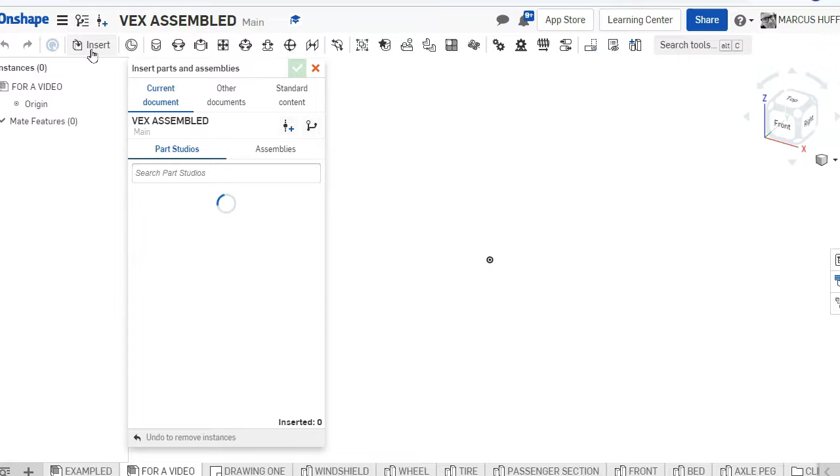We're going to choose insert, and I'm going to start with the part that's most central. When I look at this, it's the passenger section. So I'm going to click on that, then click out here somewhere and accept that. Starting from this view, I'm going to zoom out a little bit.

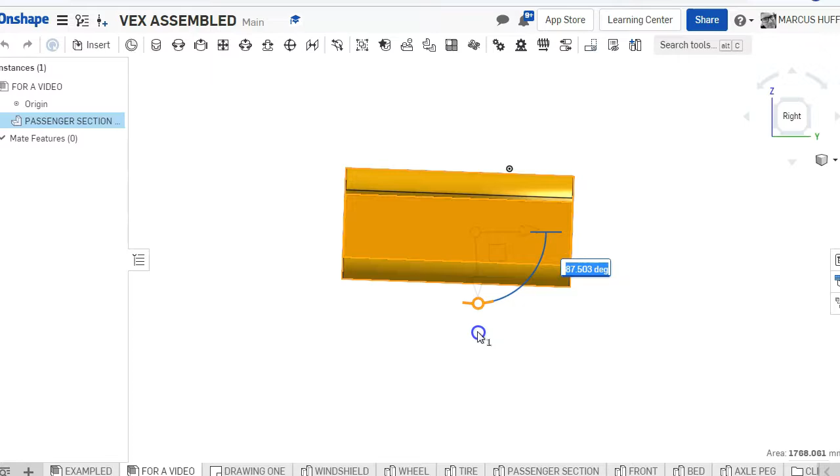I'm going to click on this and see the triad. I'm going to grab this little dot and rotate it 90 degrees so that the hole on the top is indeed at the top. So when I rotate that, you can see the passenger section is in the right place.

I'm also going to right click on this first piece, and only the first piece, and choose fix. What that does is lock it to the XYZ axis so that if we move it around, the axis follows this part. If you don't do that, your assembly can get misaligned. Let me repeat that: if you do not fix the first part, your assembly can get misaligned.

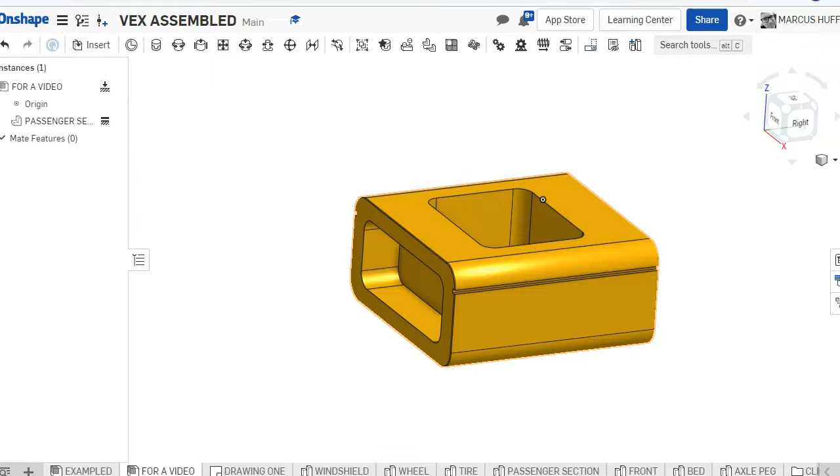Now we're going to add another part. I wanted to place that kind of far away from it so that I can see the faces that are going to connect.

In this assembly, I've left some things out because it was pretty complicated to get them all in there, and they really don't add any value to what we're doing for this assignment. So I'm going to hit insert part.

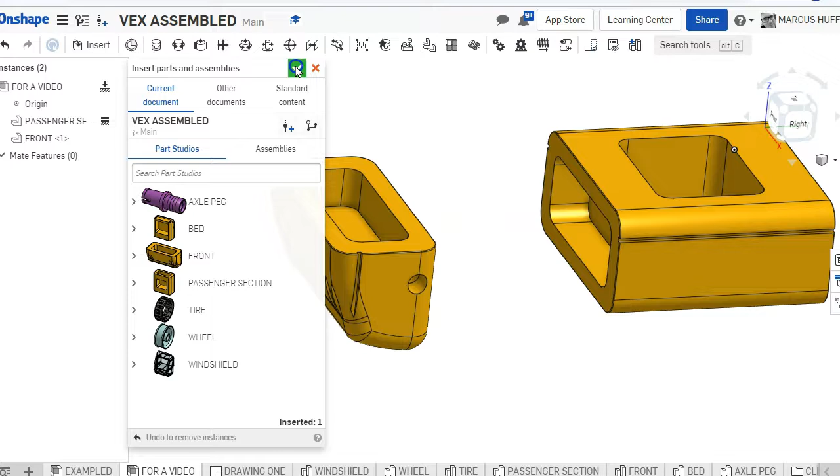So now I've got the front up here, and just like we did last time, I'm going to click on this right side and get the triad. I'm going to rotate this 90 degrees so that's roughly in place.

This doesn't have to be perfect. It can be just close and that'll be just fine. We're going to rotate it a little bit. Alright, let's try this again.

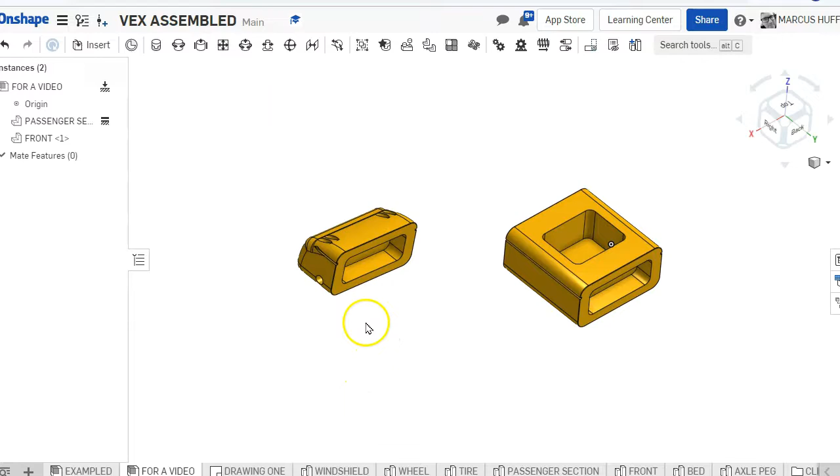There are two different kinds of constraints we can use to attach the front to the passenger base. One we can use is the planar mate, and we would zoom in and choose the face here - see how I've highlighted it - but the mate constraint position thing is in the center.

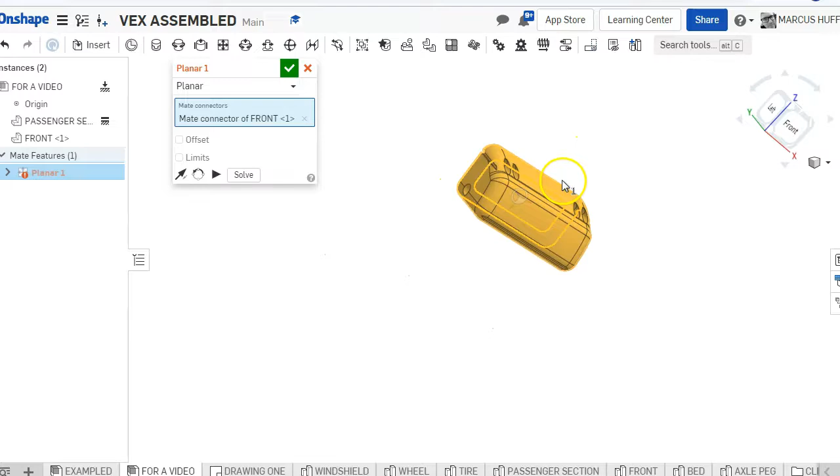That's what we want. Then we're going to rotate this view, zoom out a little bit so I can see the other one, zoom in on that. In the same way, I'm going to click on this face when that mate constraint is in the middle and it's following me around. There we go.

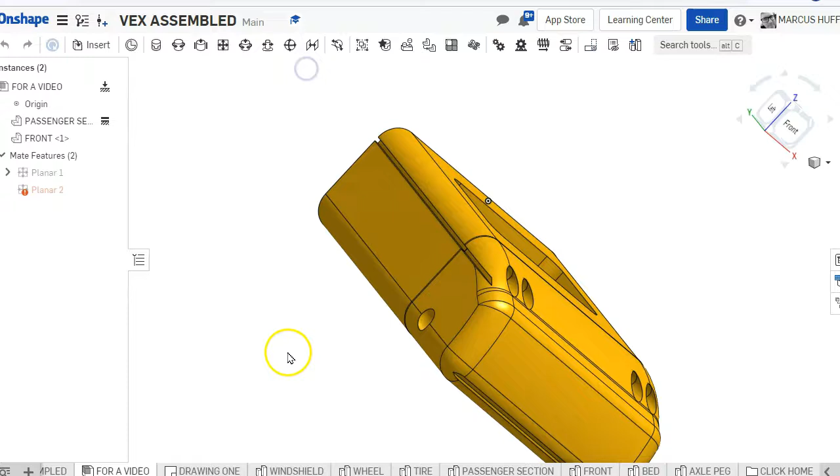And we hit apply. Now here's the thing about a planar mate: those two faces are stuck together. However, if I click on this, I can move it around. If you move it to the side, you can see it's still on the same plane - it just lets me move it. So that's really not what we want our car to do, but that's one you will need to know how to use for this.

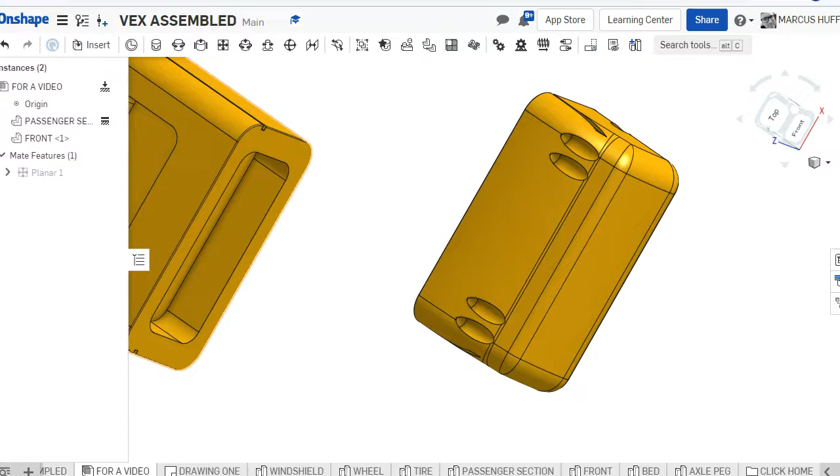So right now I'm going to hit Control Z and undo that, and remove that constraint, and we're going to put another one. What we really need is a fastened mate. We want the front of the car to be fastened to the body section.

So I'm going to zoom in on this one. We're going to rotate it a little bit.

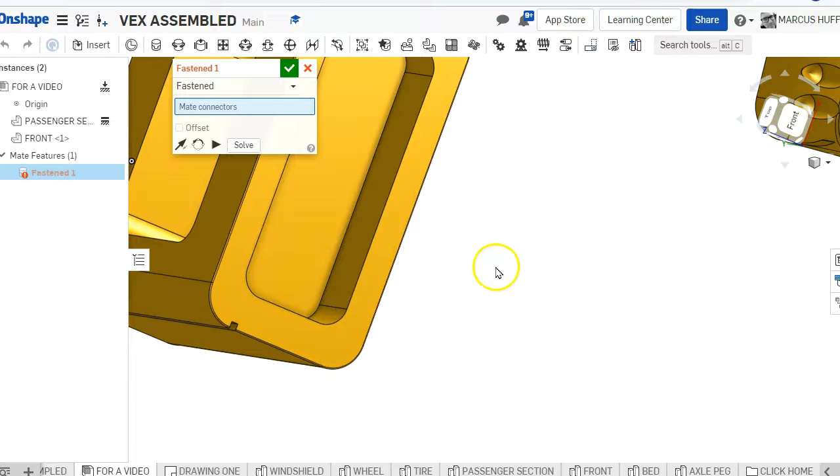In the same way, I'm going to point at this and wait for the center one to pop up again. That's the one I want. Then I'm going to point at this one, and I want the one in the middle showing up there towards the left. You can see it, click on that, and fasten those. If you look at this now, we zoom out, try to move it, it doesn't move. That's what we want.

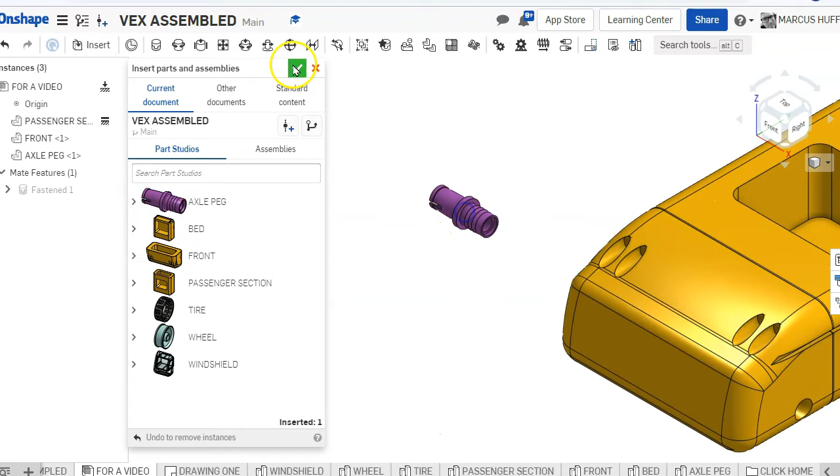Now we need to add an axle peg. Once we get the axle peg placed, we can apply a constraint. In this case, let's not use a revolute. I had to think about this for a little bit. We want the axle peg to be fastened. We don't want the axle peg to turn. It needs to be fastened to the body, so we're going to use the fasten mate.

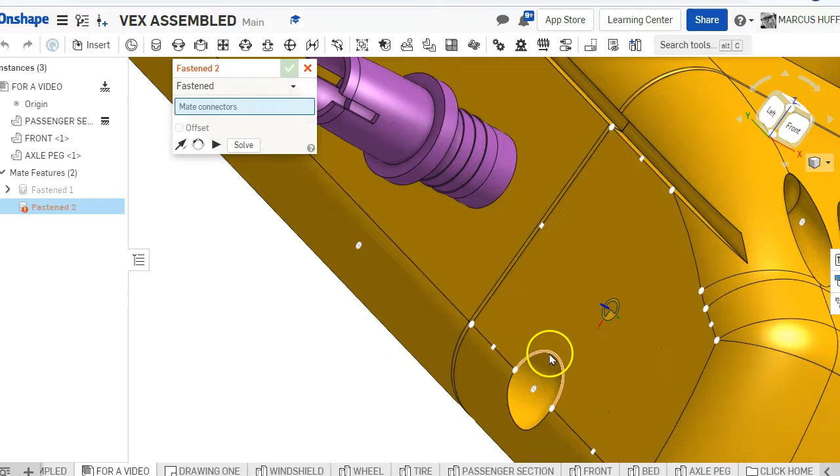I'm going to zoom way in on this hole. What I want to do is choose the one that's got the mate connector in the center right there. Then we're going to rotate around, zoom in right here. See this one on the back side? We want to highlight that until we see the mate connector in the center. Then we click on that one and hit check.

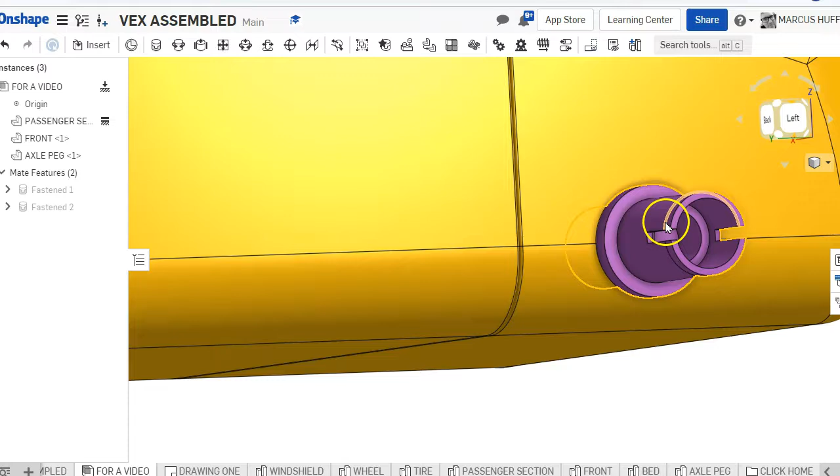Now we have the axle peg fastened in there. If you try to turn this, it will not turn because it's fastened.

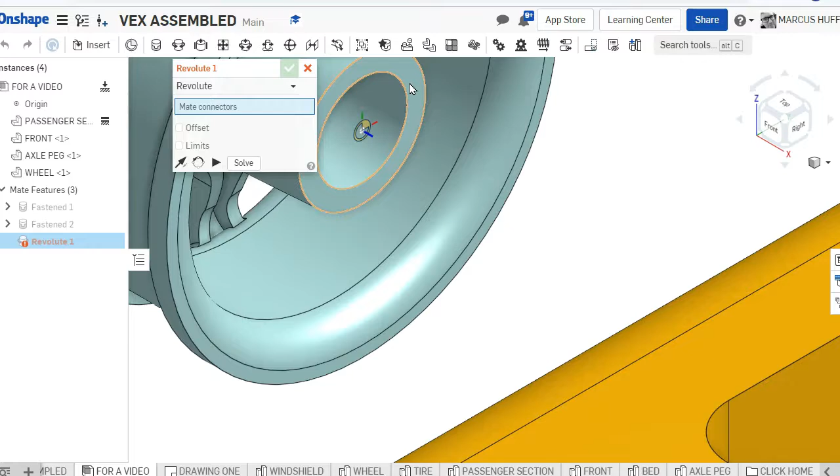Now we want to attach the wheel to the axle peg, and we do want this one to turn, so we're going to use revolute. I'm going to zoom way in on this, and I'm going to choose this circle with the mate connector in the center on the back of the wheel.

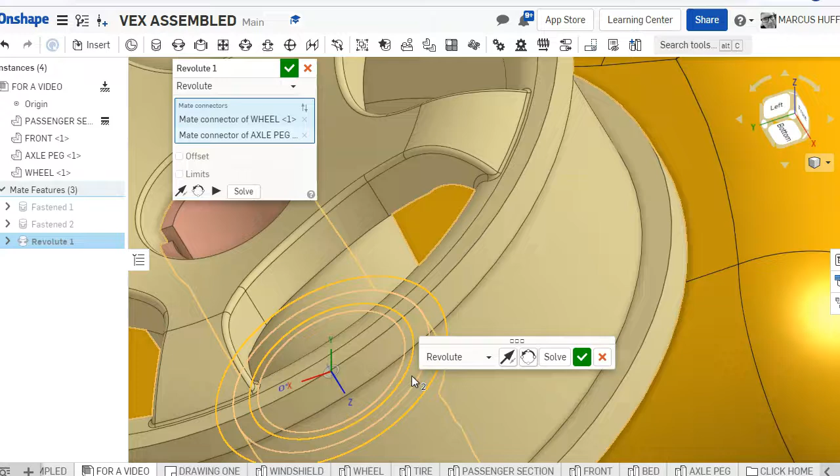Then we're going to zoom out, rotate around, and I'm going to zoom in on the axle peg, and that needs to touch here. Notice how that ring and the mate connector are in the center. Then when we do that, there it goes. Hit check, and now we have the wheel mated to the axle peg.

And if I click on the edge of this wheel and pull it, you can see that it moves. My computer's lagging a little bit. There it goes. Okay, so you can see that the wheel moves.

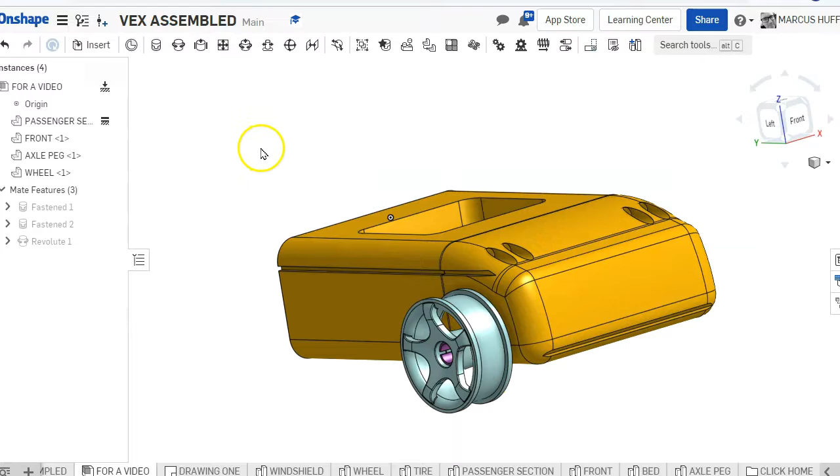Another thing is we need to add a rim—not a rim, a wheel. That's actually the wheel, the tire. The tire is what we need. Okay, so I have the tire. I'm going to click on it and drag it over a little bit, and drag it forward a little bit.

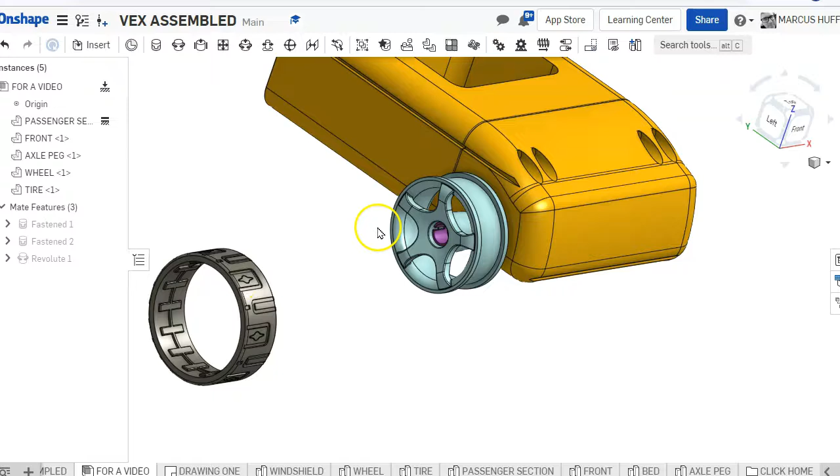Again, if you need to, you can grab the triad here and kind of arrange it until it makes sense. Okay, I know that the way this tire is made and this wheel is made, that the outside edge of the tire has to align to the outside edge of the wheel.

And I think we can save some time if we use fasten here. If you use revolute, what that lets you do is the rim and the tire can spin independently, and we're going to try using fasten.

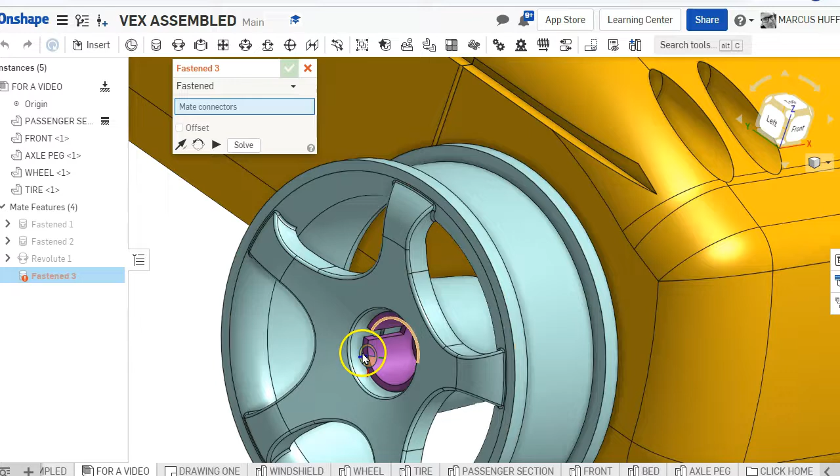So I'm going to zoom in to the outer edge of my wheel and see how it's got the center point marked. That's what we want. Then I'm going to go to the outside of this tire and zoom in there, and I want that center point showing. When I click on that, it puts the rim and the tire together.

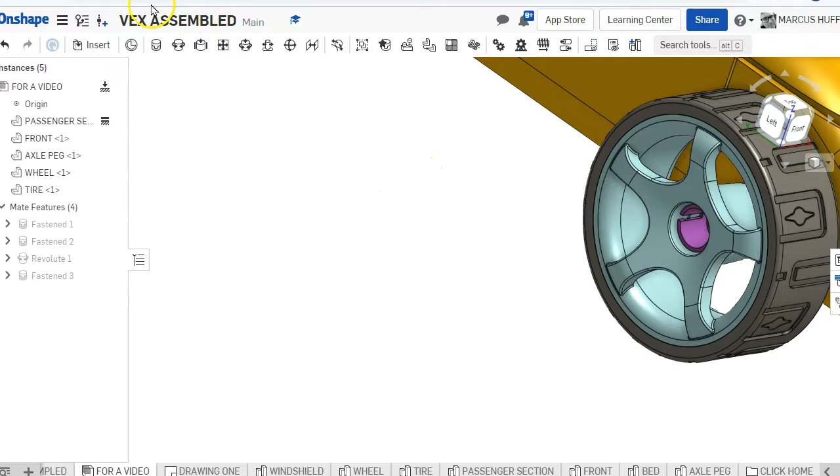And if I turn the rim, the rest of the wheel also turns. Okay, so they turn together. That's just a real quick reminder about how to do assemblies.

So we talked about using the planar, revolute, and fasten mates to help you assemble these parts.